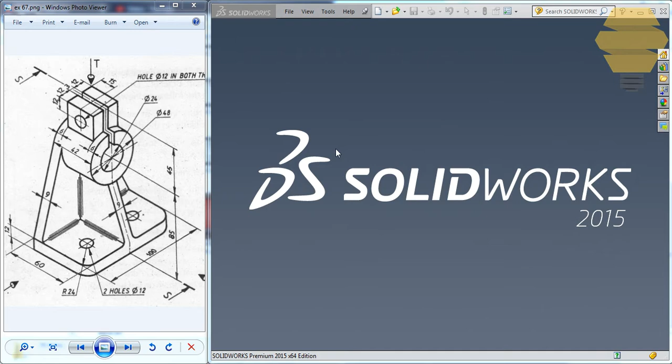In this video, we'll work on exercise number 67. To start off, we'll go to File, New, and double click on the part template. Now we have the empty part template open. Let's go to sketch and decide where we need to start. In this case, I'd prefer to do that on the top plane, so I'll do it this way. Now what I would do is create a center rectangle.

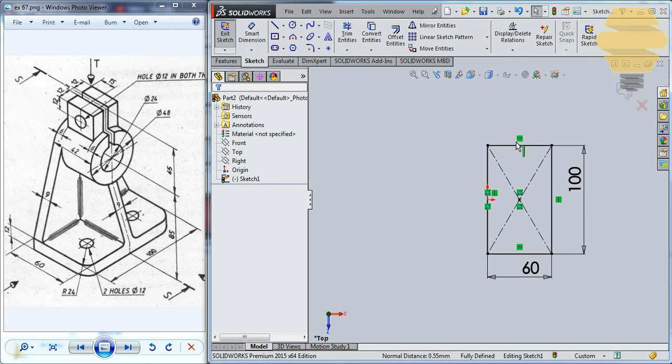And I'll start dimensioning it. That would be 100 by 60. I'll just place this on this midpoint, tick mark. Now we have the sketch fully constrained. Exit the sketch now, and then we can go for features, extrude boss and base, and we'll do an extrude of how much? 12.

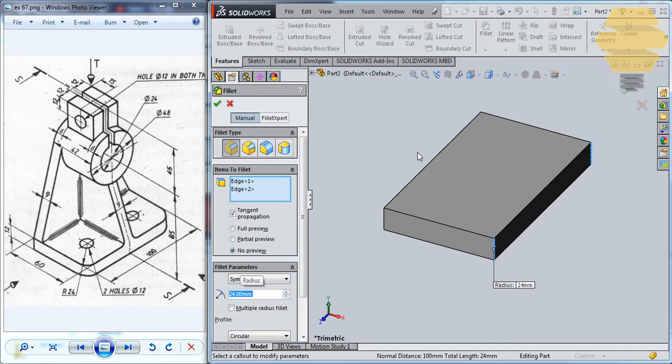And now let's do a chamfer over here of radius 24 on both of these two edges. Not a chamfer, a fillet, I mean. How much? 24. It cannot be 24 there, so it's technically looking odd. Doesn't look 24. Alright, let's just keep it this way and move forward.

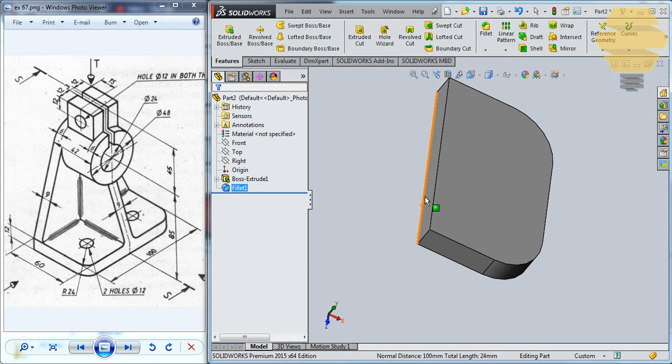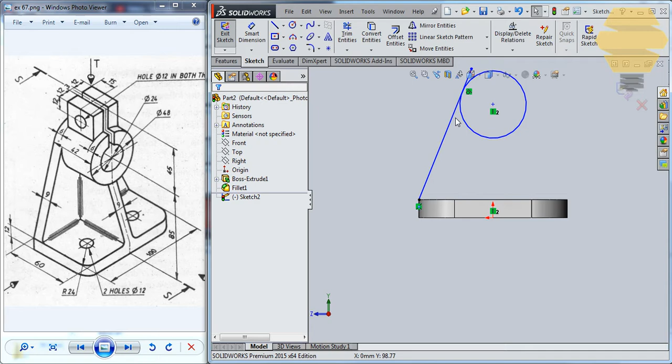So now let's take this face over here and do a sketch. Control 8 on the other side. Now what we do is we'll just create a circle and then create a line from this edge upwards and tangency over here. Tick mark, select this origin and this point here. We'll go for vertical, tick mark, and we'll just select this line here and go for mirror entities, not the mirror entities.

We'll just use a center line and do a center line here. Select this line here and go for mirror entities. Select the mirror about and select this axis here, tick mark. And now you can do trim entities and trim the unwanted portions. And now you can also trim this portion here.

Alright, now let's do a dimension for this. So that's radius 24 because it's diameter 48. Radius 24 will do. And it's also at a distance of 85 from the bottom. So from here to here, from here to here, it should be how much? 85. Now you can see, alright, as we have mirrored this, we also need to redefine this tangency here.

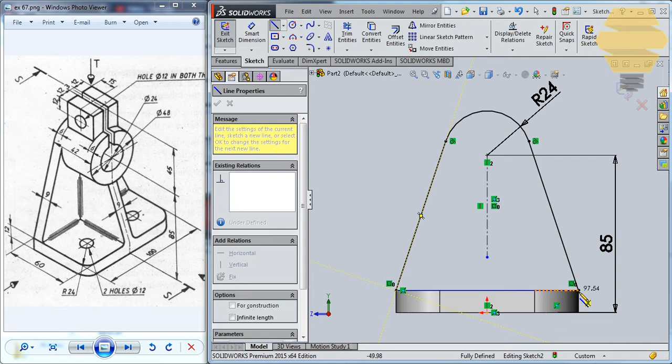So now it's fully constrained. Also, let's complete this loop by drawing another line here, and now exit the sketch, and now you can go for extrude boss and base and extrude 9 on the other side.

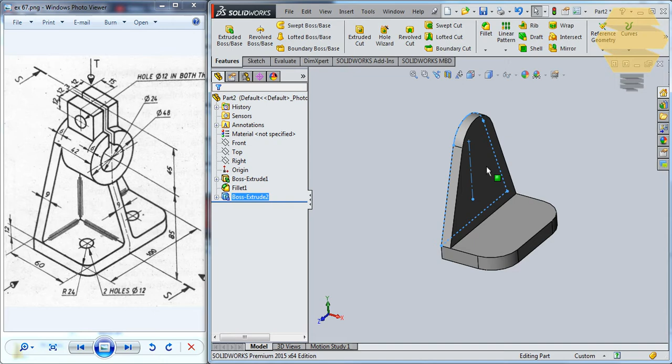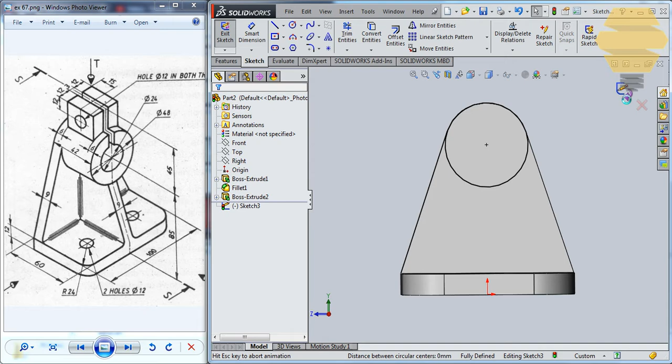Alright, now what we do is we'll create another circle here. With respect to the same center, you can do it. And just need to make the circle a little smaller and just coincide this with this. Coradial, tick mark. Now exit the sketch and do a feature extrude boss and base.

42 minus 9. That's what you need to give. 42 minus 9. Alright, now we have that.

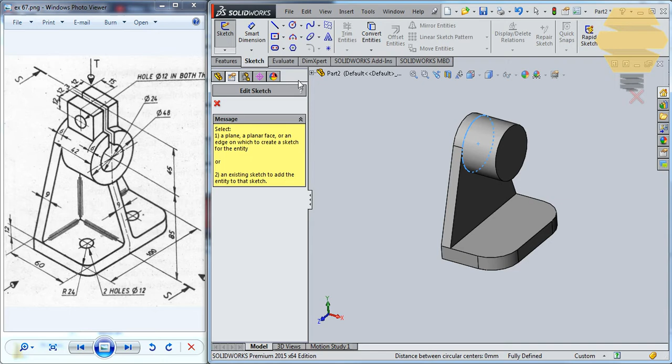Now what we do next is create this rectangular portion. So to create that, we'll take the sketch and do the sketch on the front plane. Right? Control 8. Okay, and now I'll simply create a rectangle.

And what I would do is dimension that. The overall edge over here should be 30. So this is 30 here. And what's next? The overall height from here to here, to the center of the circle, or else you can take it to the bottom. So from the top, zoom out a little bit, to the bottom is how much? 45 plus 85.

Now that's constrained. Alright, that's good. Now from this edge it is 6. So from this edge it is 6. Now everything is constrained. You can leave this edge open. Alright.

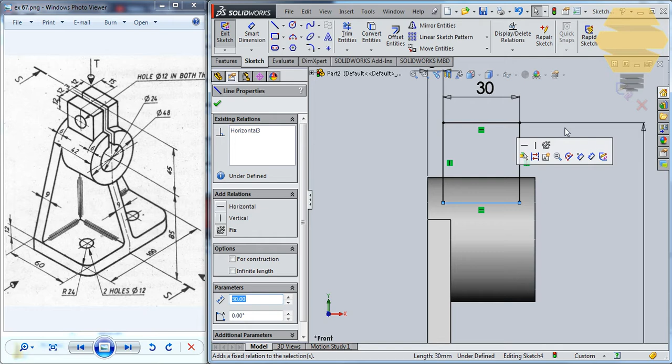You can just leave this edge a little downwards, leave it open, exit the sketch, and now use the feature extrude boss and base and give the overall length of this, that is 12 plus 3, 15 plus 12, 27.

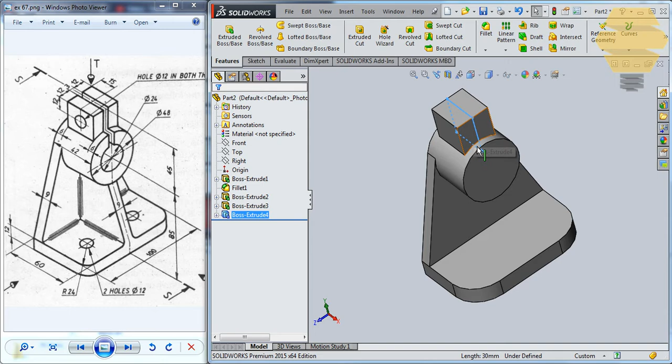So 27 divided by 2, right? 13.5 can be input on both sides. Tick mark. Good. So as I've done an extension over here, that's the reason this got filled, right?

If you see it here, you can see it very clearly. If I had given the sketch only till here, then this gap would have been open, right? So that's it.

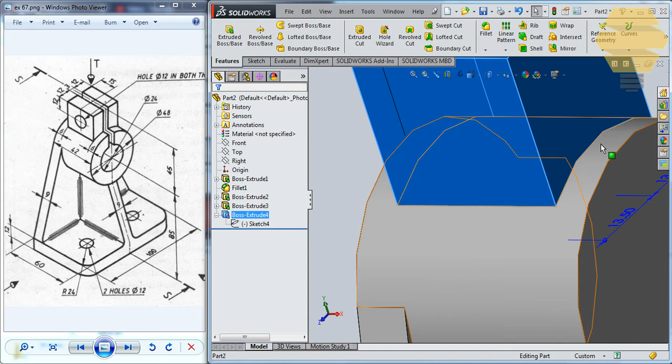Now you need to do this slot here. To do that, take this face, go for the sketch. What you can do now is simply create a circle and do the smart dimension. The diameter is 24.

Now we have to do this slot here. To do that, we'll simply create a rectangle and dimension that rectangle. How much? 3.

Control 8, zoom in a little bit. Now you can just move it over here, and you can take this edge and this point over here and go for midpoint.

I can also take this edge here and this edge. You can go for collinear. Good.

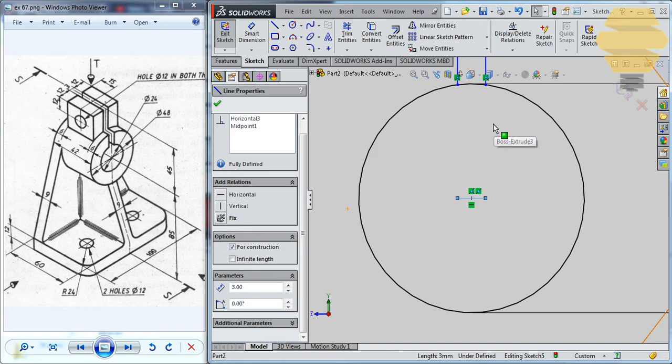Now you can use trim and just trim all the unwanted. You can select this edge here and go for geometry, for construction. Alright, and also remove this.

And we have that. Now you can see that the line color is still blue. So you can just drag it over here and you can see what's wrong here, it's still moving here and there.

So what you can do is use the axis line, just draw a line upwards, vertical, tick mark. Then select 1, 2 and 3 and go for symmetric, tick mark. Now you can see that all the lines have turned black. You can exit the sketch now.

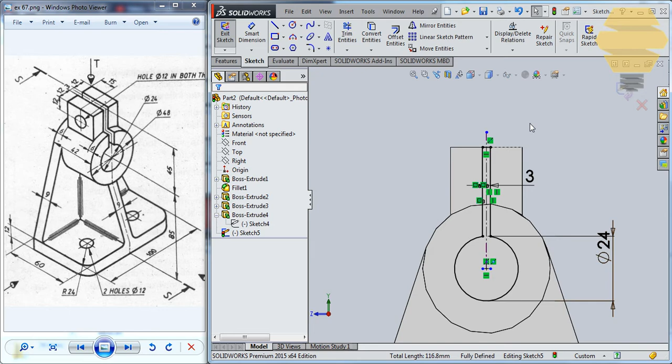You can simply go for extruded cut up to next. Tick mark. Now we have that done as well.

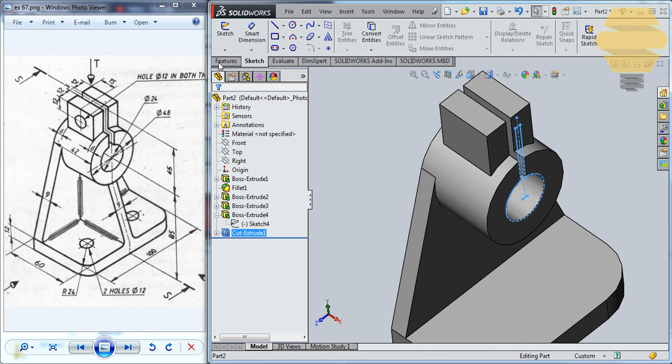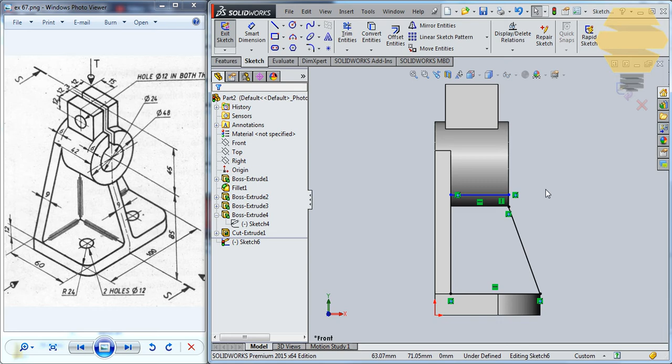Now we have to do a little geometry over here. So I'll go for sketch, on the front plane. I'll simply draw a line from this point to this point and to this. I'll just extend a little outwards for the same reason I've done on the other side. I'll simply exit the sketch and go for features, extrude boss and base.

So this is 9 here, so for that reason it will be 4.5 on both sides. 4.5. Now we have that done as well.

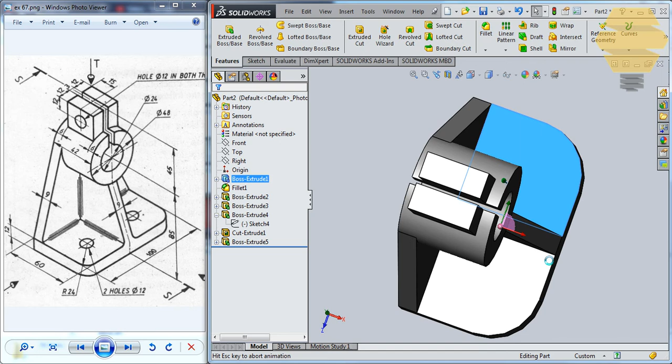So now we have 2 holes to be created. Let me take one of the faces here and create a circle and dimension that circle. That would be of diameter 12 hole. So just input the diameter and now place that circle.

So they're saying I have to take this. Okay, this is where the circle has to be, that's what they're saying. So how did I do that? I clicked over here, I moved, and I wanted the center of this circle on this edge here. So I placed my cursor here, highlighted that edge, and just moved it here.

And it got placed. I can simply draw another center line here and use that circle, go for mirror entities, use mirror about, click on this axis, click tick mark, and we have that circle created as well.

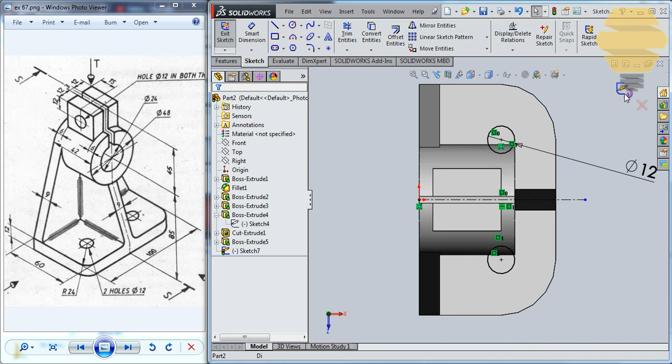You can simply go for extruded cut up to next, click on tick mark, and that's done as well.

So that's it about this video. I hope you enjoyed. Thank you.